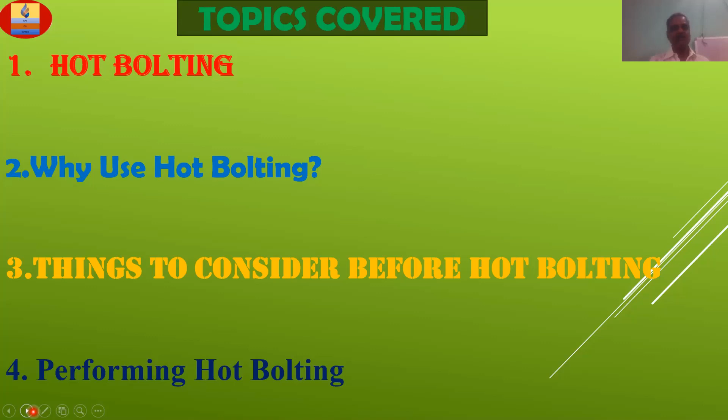Normally in the oil and gas industry and chemical industry, major shutdowns and minor shutdowns take place. A few days or a month before, they do hot bolting. Let us learn what hot bolting is.

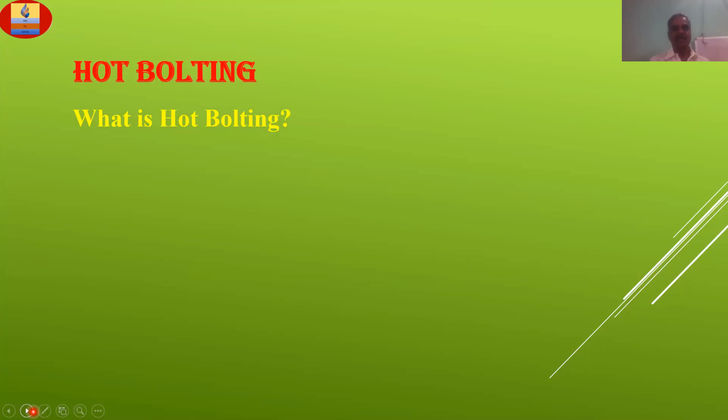See, hot bolting is the practice of removing and replacing, or freeing and retightening, bolts on live piping and equipment. It is potentially hazardous and the utmost caution needs to be exercised when planning and carrying out hot bolting activity.

Why remove and replace? There are corroded bolts, damaged bolts and stuck bolts. Let us talk about them one by one. These damaged bolts need to be replaced with new ones. So in the sequence of the activities, we have to go through this.

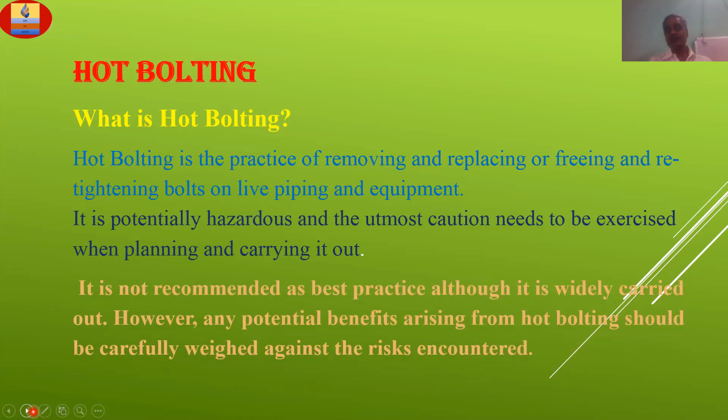It is not recommended as best practice, although it is widely carried out. However, any potential benefits arising from hot bolting should be carefully weighed against the risks encountered. Safety is most important. At the same time, you have to analyze the risk before doing any hot bolting activity and take precautionary measures to mitigate the risk.

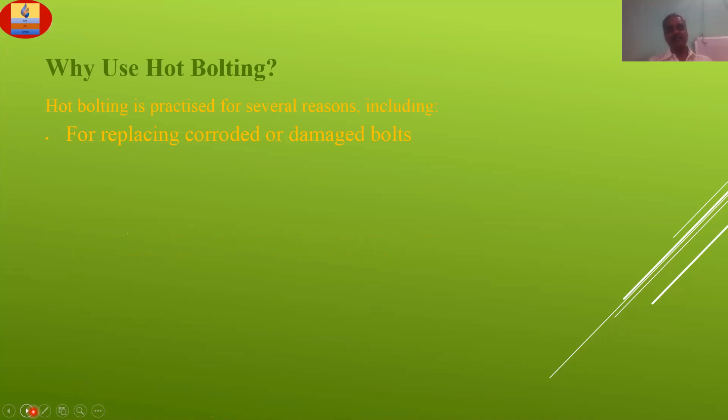Why use hot bolting? Now see, hot bolting is practiced for several reasons, including replacement of corroded or damaged bolts, and upgrading the material specification or grades of bolts. Sometimes they will upgrade the nuts and bolts. Also, to minimize the time spent freeing bolts during plant shutdown.

Why is this? If you try to open the flange breakup joint during the shutdown, sometimes because of sticking and corrosion conditions, each bolt will take a lot of time. We have a very short duration for shutdown activities. So prior to shutdown, we have to free these bolts and, if required, replace them with new ones.

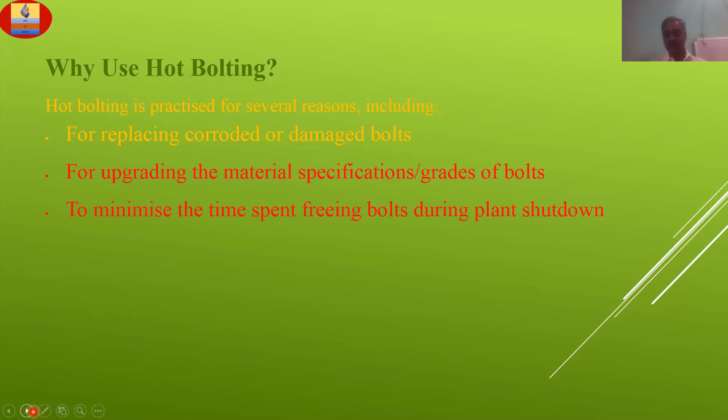As a practice, the Engineering Equipment and Materials Users Association, EEMUA, publishes an information sheet called Guidance Procedures for the Removal and Replacement of Flange Joint Bolting on Live Piping and Equipment. This is essential reading before carrying out any hot bolt work on live plant, whether piping or equipment.

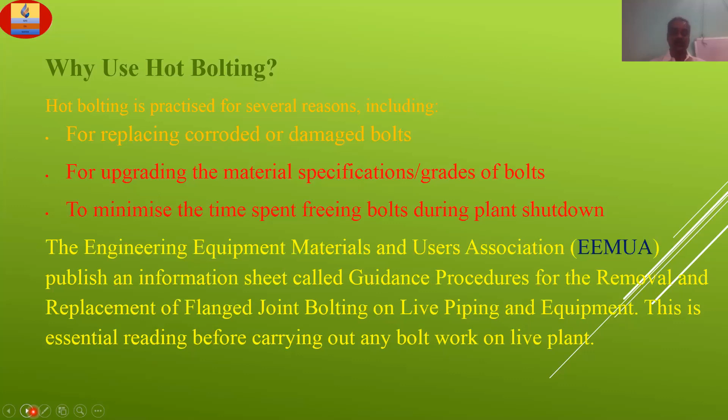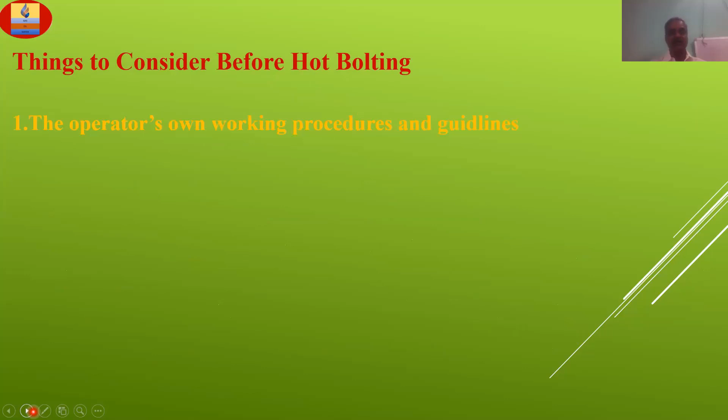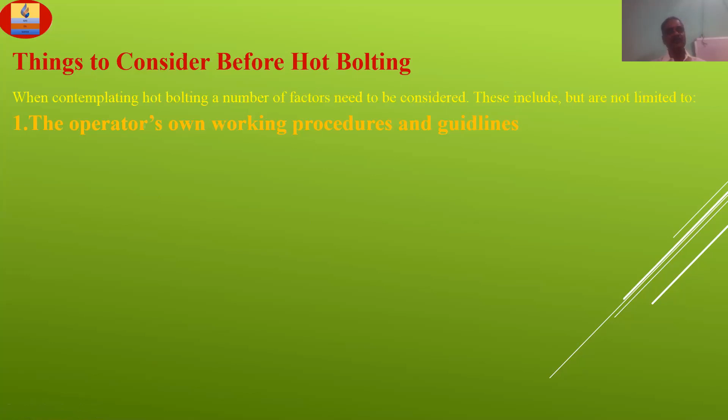So, things to consider before hot bolting. When contemplating hot bolting, a number of factors need to be considered. These include, but are not limited to: number one, the operator's own working procedures and guidelines. Number two, the piping system and the system's operating pressures and temperatures.

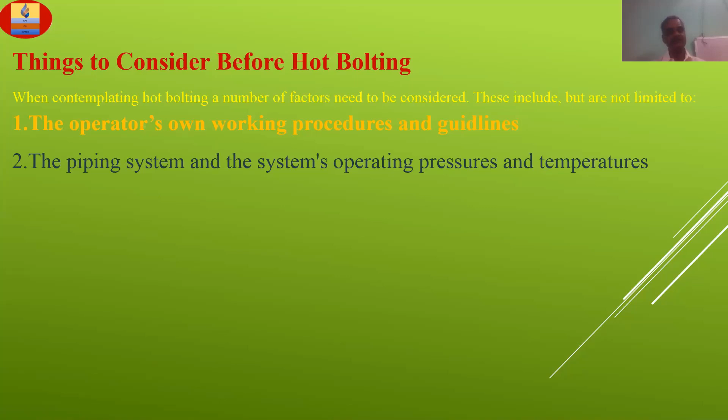Flange joints considered for hot bolting should have a minimum of 8 bolts. You cannot do it on a 4-bolt flange. It should have minimum 8 bolts. The bolt material should have a minimum strength equal to or greater than grade B7 or 2H. Okay.

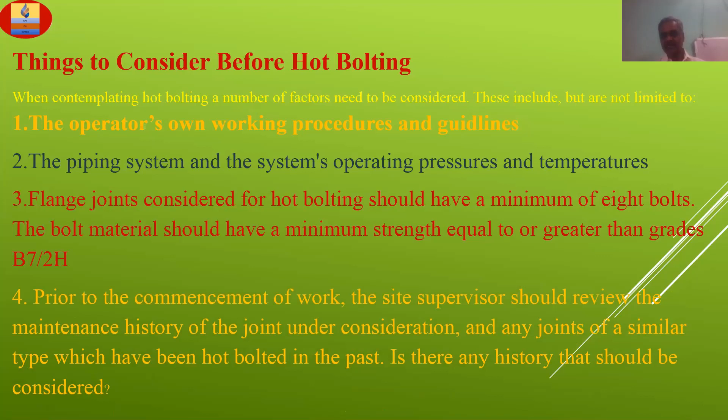Prior to the commencement of work, the site supervisor should review the maintenance history of the joint under consideration and any joints of a similar type which have been hot bolted in the past. Is there any history that should be considered? We have discussed the flange management system previously. If you go through that video, you will understand what the history is.

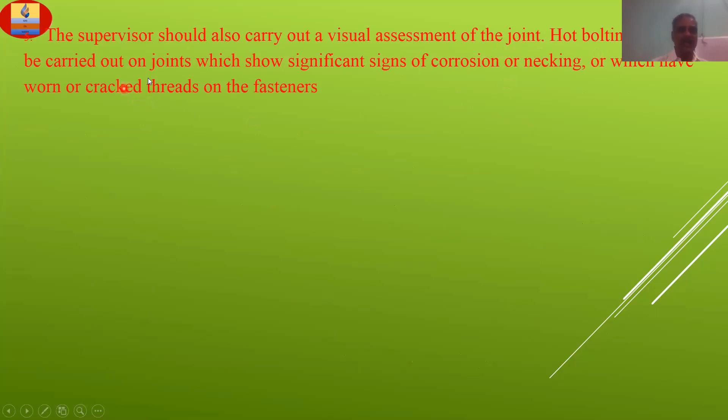So, the supervisor should carry out a visual assessment of the joint. Hot bolting should not be carried out on joints which show significant signs of corrosion or necking, or which have worn out or cracked threads on the fasteners.

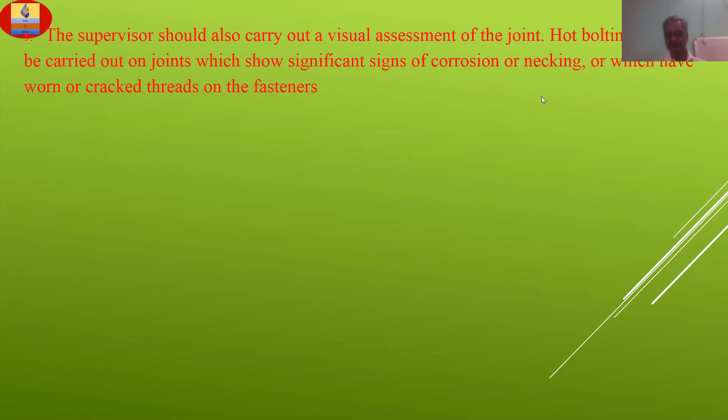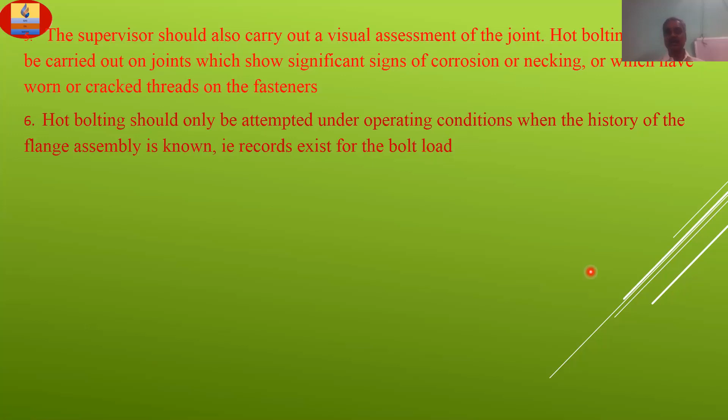Hot bolting should only be attempted under operating conditions when the history of the flange assembly is known and records exist for the bolt load. We should ensure that previous records are available and that we apply similar torque during the hot bolting activity. As I told you, go to my previous video on flange management, and you can understand what the history is.

The consequences of joint leakage during hot bolting should be considered, for example toxicity, flammability, and temperature of escaping fluids, and all necessary precautions should be taken. A contingency plan should also be put in place for escape or emergency, for example means of communication and provision of standby equipment. The contingency plan should be in place.

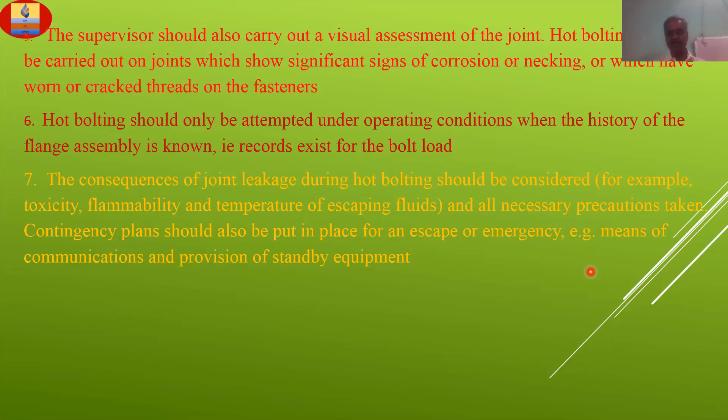Pipework within the vicinity of the joint to be hot bolted should also be reviewed. Pipe supports for the local section should be checked to ascertain whether they are taking the load on the pipe, along with their overall condition. If the pipework displays any significant signs of vibration around the specific flange, then hot bolting should not be considered as an option until that vibration is arrested.

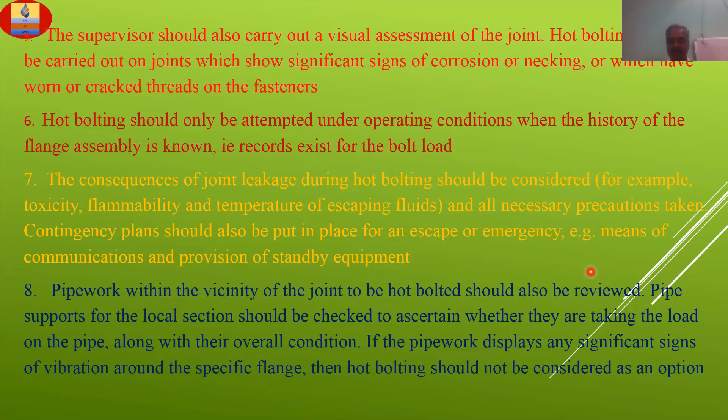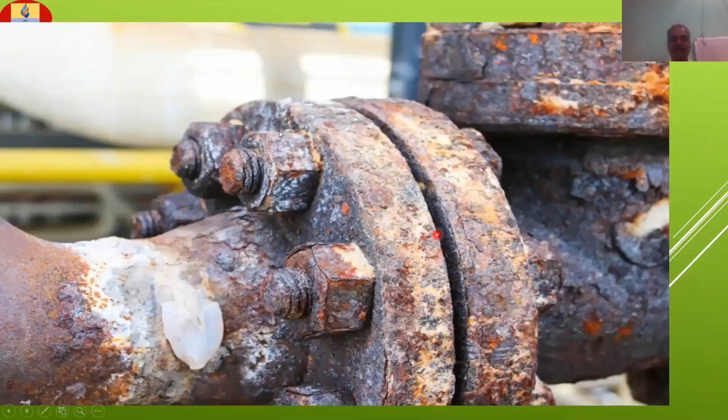Is it clear? See some pictures I will show you. This is the process piping example. When you do hot bolting, you should ensure that these bolts are not corroded, okay? Or don't have any damage. What happens if you try to do it on corroded bolts like this? Under some conditions it may fail. This is all live line, so accidents will take place. That is the reason we are not supposed to do it on this type of joint.

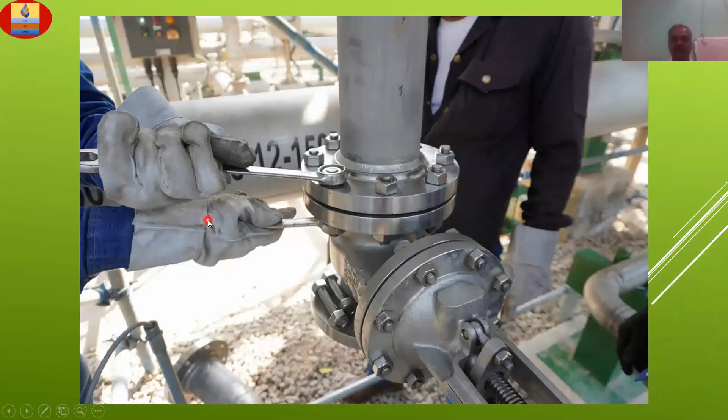Performing hot bolting activity: the site supervisor shall check all the necessary personnel, materials and equipment are at the work site. That means he should ensure all safety gloves, goggles, helmet, safety shoes, and the right torque wrenches or spares are there. Okay? And each bolt shall be checked for tightness; any abnormal conditions such as loose bolts, report to the supervisor.

Suppose there are 8 bolts, maybe 1 bolt is loose. You should record why it is loose. Because of thermal expansion and contraction during operating conditions, it will take place. One or 2 bolts may be loose, but there won't be any leak because there is a lot of bonding with the gasket. Hence, we should report any bolt that is loose.

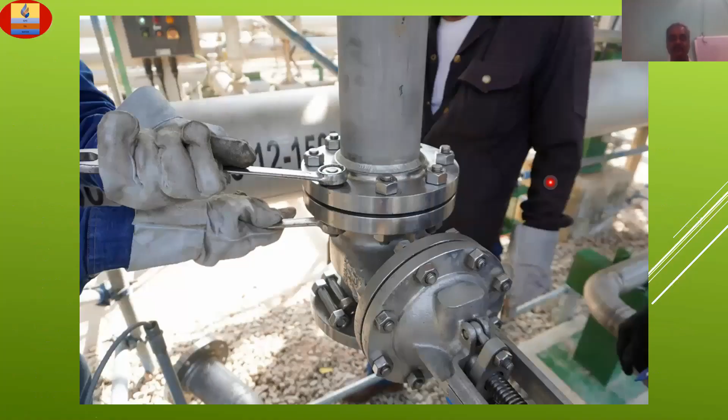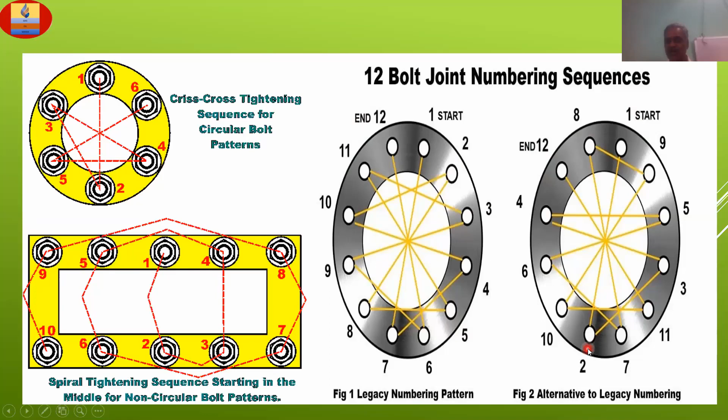And legacy number pattern: 1, 2, 3, 4, from right side to top. Okay. And tightening starts from 1 and 2 here. So alternative to legacy number. Like this we have to do tightening. Okay, my friends.

Remove, examine, clean and lubricate each bolt, complete with nuts, for reuse. Any damaged bolts or nuts shall be disposed of and replaced with new items to the correct piping specification. If there is any doubt, the material shall be replaced. All exposed flange surfaces must be cleaned and the area under the nut lubricated.

Ensure no bolt cutting by any hot methods. You are doing hot bolting; it doesn't mean you are supposed to use gas cutting, grinding and all. No. We have to do only cold work activity on a hot bolting job. So you are not supposed to use any hot methods, including burning and grinding. It's not usually permitted during bolting operations. Any cold bolt cutting, including hydraulic nut splitting, is usually only permitted by specific supervisory approval of the relevant technical authority.

Ensure that the bolt has been correctly tightened before moving on to the next bolt in the sequence, as we discussed. Initial retightening of refitted bolts shall not introduce additional local compression of the gasket. Got my point? If you are tightening as per the previous records, the torque load should not give additional compression to the gasket, because if you give additional force on the gasket, it will get damaged. Okay. So it is a danger also.

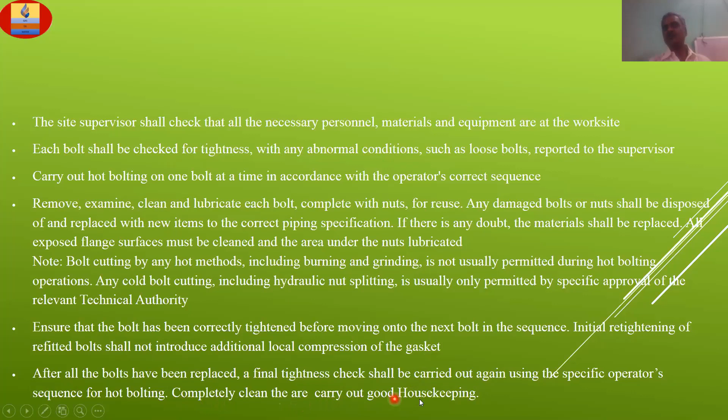So after all the bolts have been replaced, a final tightness check shall be carried out again using the specific operator's sequence for the hot bolting. Completely clean the area, carry out good housekeeping. These are the hot bolting activities. So this is the way we have to perform hot bolting.